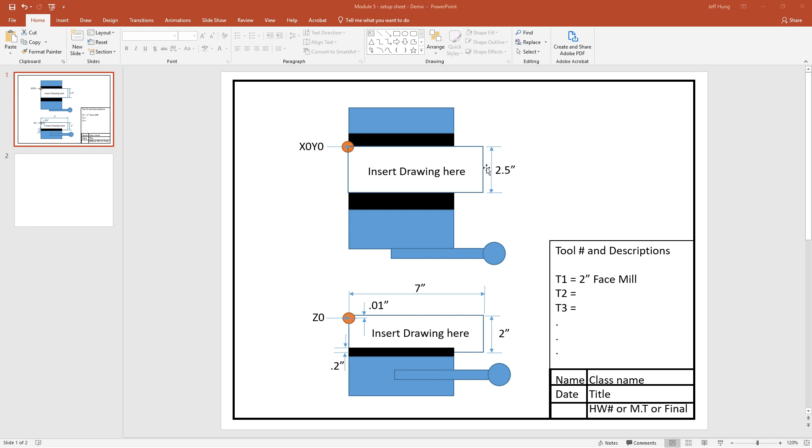Let me start with a new page, and we can start with the frame. Use Insert, Shape, use this rectangle, and just draw a rectangle here. Then use the format and change the fill to no fill. The frame, I want to use black color, and I can actually make it thicker.

I can copy it by holding the Control key, move this over, so there will be two rectangles now. I can make it smaller so I can get the frame like this. Then we can make it bigger a little bit.

Then I'm going to repeat that, and I can repeat this. Just copy one more time. Then you can get a title block like this.

Then all you have to do is repeat this again. Again, hold the Control key. I can make this frame like this, highlight it and move a little lower so I can have everything on this line, just a little lower.

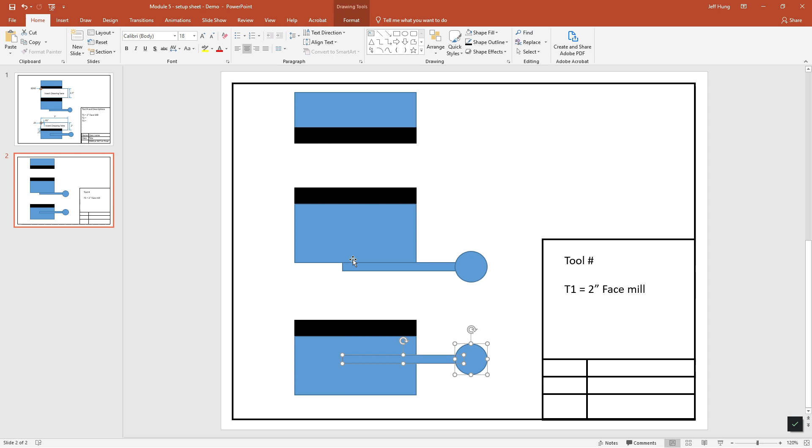Now obviously the scale, you have to change it. If you have a big drawing, make your parts big, make your vise smaller. You can scale everything down a little bit by selecting everything, just scale a little bit like this, but then you just have to move them.

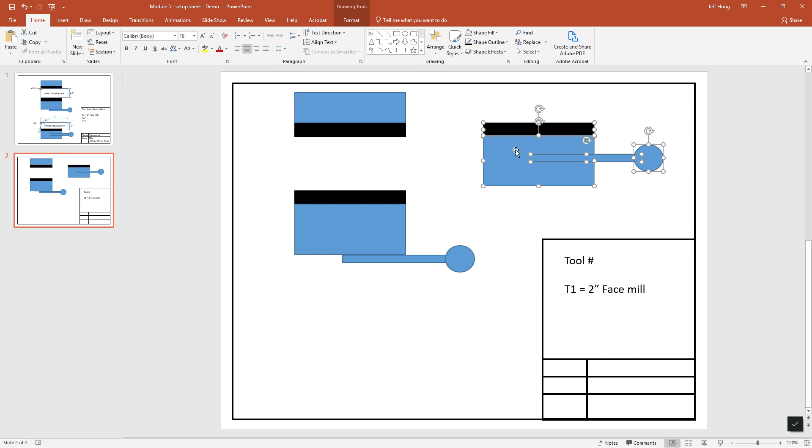Now it is important to have the vise line up following the orthographic projections. So do not place your vise something like this or something like that, because the top view and the front view should not be placed like that. You should follow the orthographic projection that the top view should be above the top of the front view.

If you wanted to have the side view, it will look something different. So if this is a side view, we can do the same thing. Let me move everything over here.

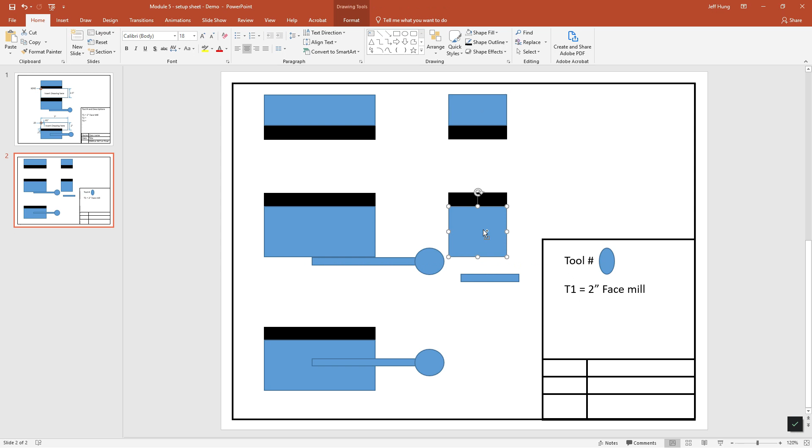If I want to have the side view, I can copy it, but this time I don't need the whole thing. This is the base of the vise, and this is pretty much just the handle. Something like this. Now that's the side view of the vise.

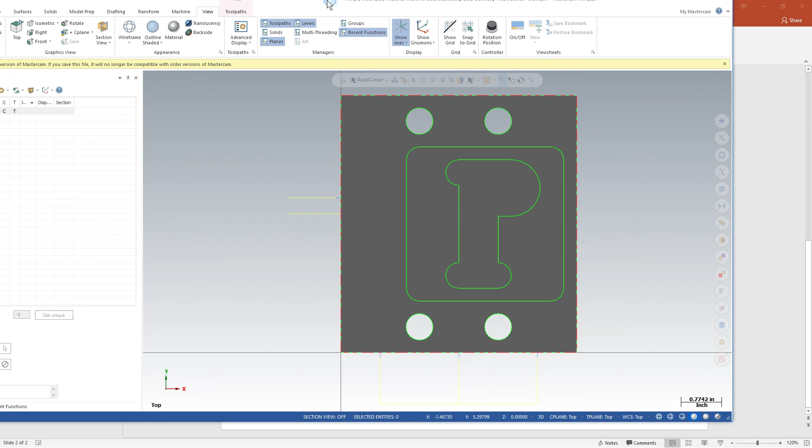So now assuming I have a drawing, I'm going to show you a drawing. Say I have this drawing and I want to put it on the vise. So all you have to do is use either print screen or the snipping tool on your Windows program, the Windows OS snipping tool.

There are other ways to do it. You can use print screen. I'm not sure about the Mac, there is another function also like a print screen, so you can get that screen and then edit it in PowerPoint. Let's say I'm going to purposely make it bigger so it feels like you are using print screen. Print screen actually captures the whole screen, but with the snipping tool you can use just a small portion of the screen.

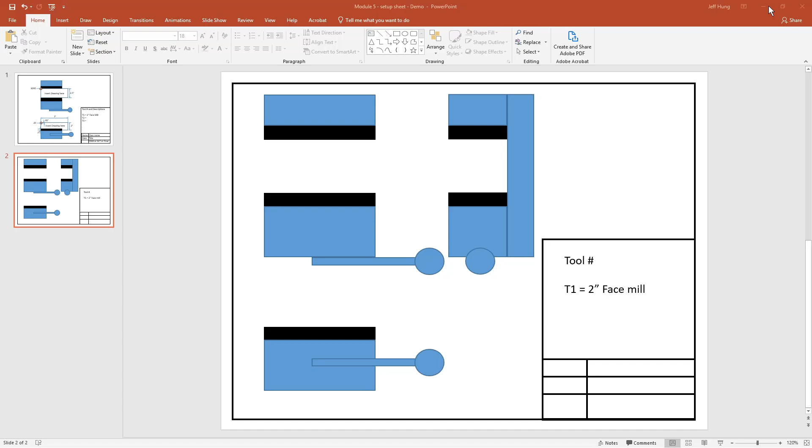So I get that, now I can place it in here, Control V. So this is the drawing. Now because I don't need these parts in here, all I have to do is crop it.

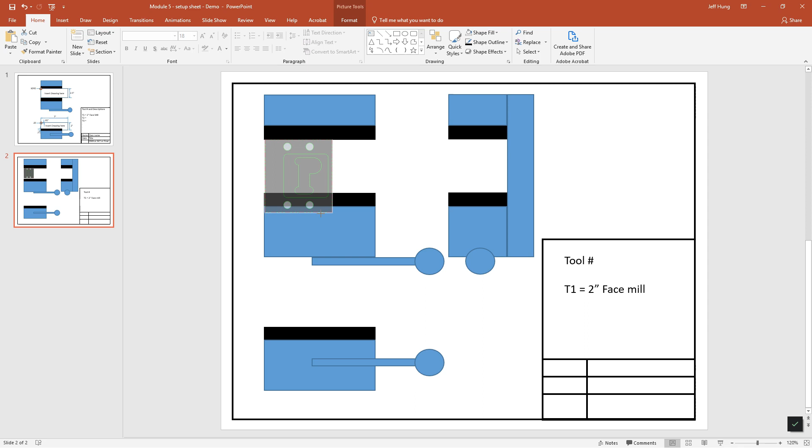Don't worry about the little gray area. So you get this drawing. Now I can scale it down, something like this. Or obviously if you want to make it in scale, if this part is this big, you should make this part that big. And actually you have to move everything accordingly.

Now that will be your top view, side view, actually the side view of the top. So if you're doing it this way, this is your front view and this is your side view. If you do it this way, that's most likely your front view and that's your top view. So it really doesn't matter. All you need is to show people how you hold this part. You can use this part, it doesn't matter.

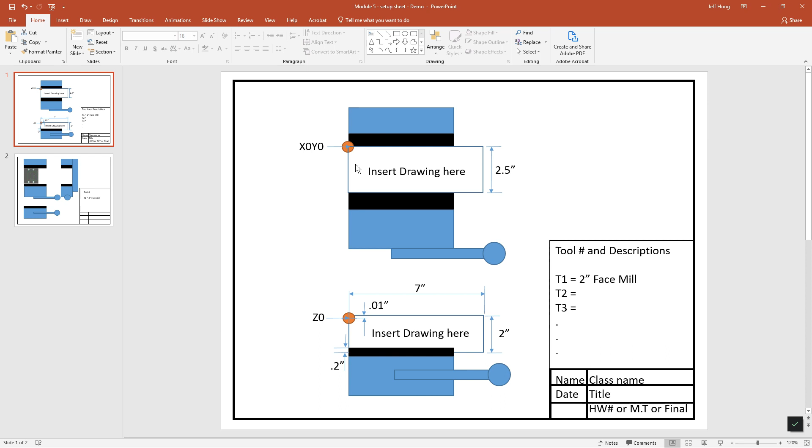But it's important to show this view because you want to see the parts where the X, Y, 0 is. Now to do this part, to indicate the XY0 and also to indicate the size of the block.

So you have to draw lines. You can do the arrows. So that's the size of the arrow. And if you want to use the text box, you can create the size. This is 5 inch.

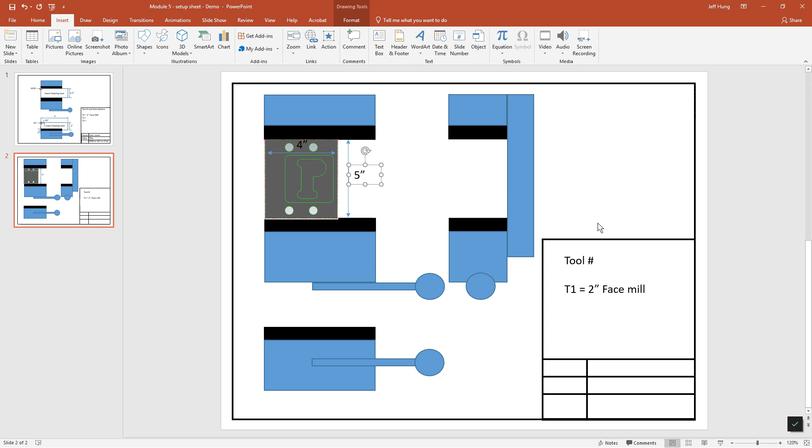Actually, I will do another line in here. That could be 4 inch. And then in the bottom, assuming this is a rectangle, you can do the same thing in here, but instead of copying from the image that you may not have, you can create a rectangle like this.

Now keep in mind this line should be the same width. Don't draw something like this because this is not matching. And I'm going to use clear this time and go something like this.

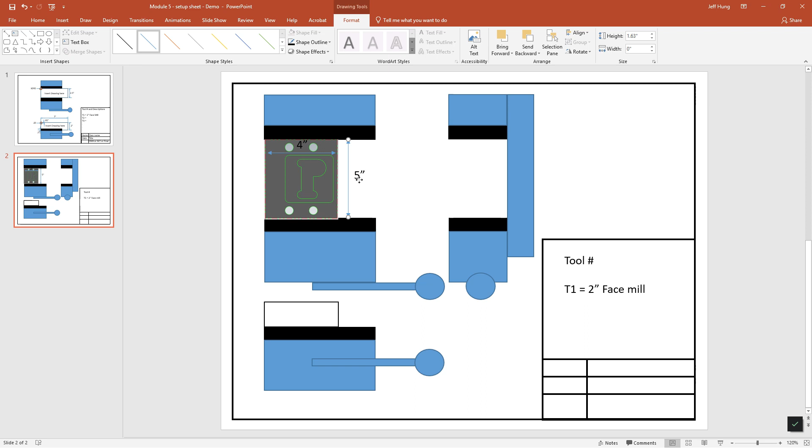Now it is important to show how much this is holding. So if the whole thing is 2 inches or 1 inch, you will need to specify what they are. So you can show it in here by copying this too. I'm going to use these dimensions. So you indicate the block is 1.5 inch, for example. So this block is 1.5 inch.

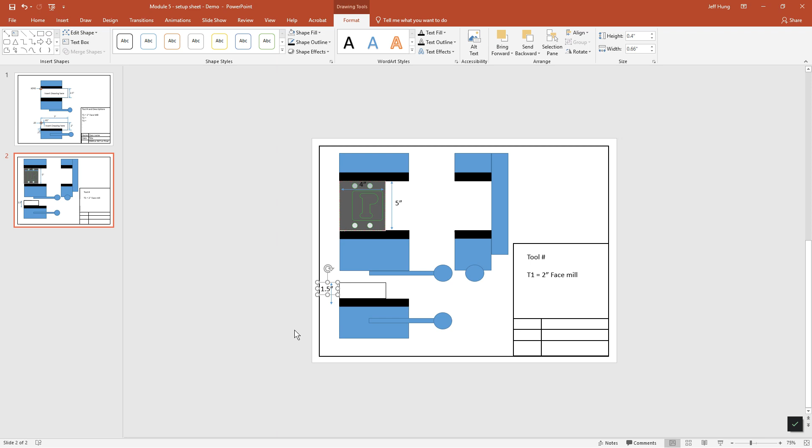Now I don't have enough room. Probably I will have to get rid of this side view because I want to use these two views instead.

So in here I have the whole block is 1.5 inch, but I'm going to hold it for 1/2 inch. So what I have to do is draw a line to indicate where they are.

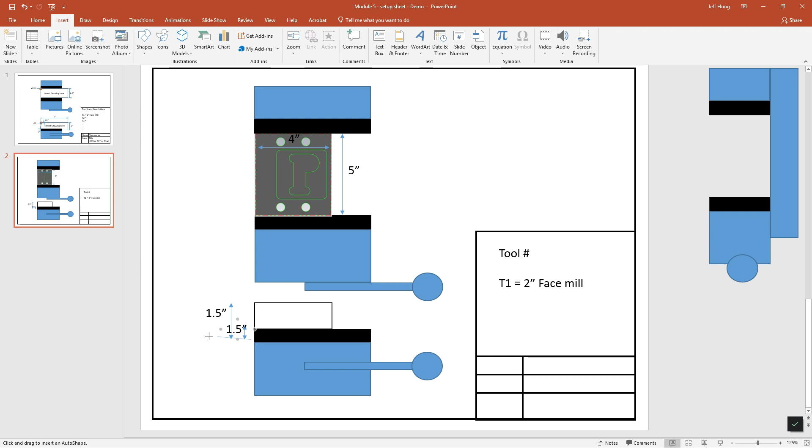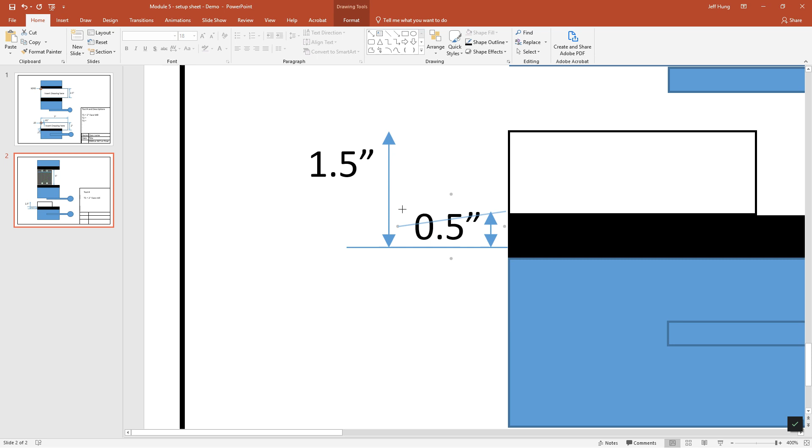So I can go do like this. I can move this over. So I'm going to move 0.5 inch right here. So this way you can tell the machinist you are holding this part. The part is 1.5 inch thick.

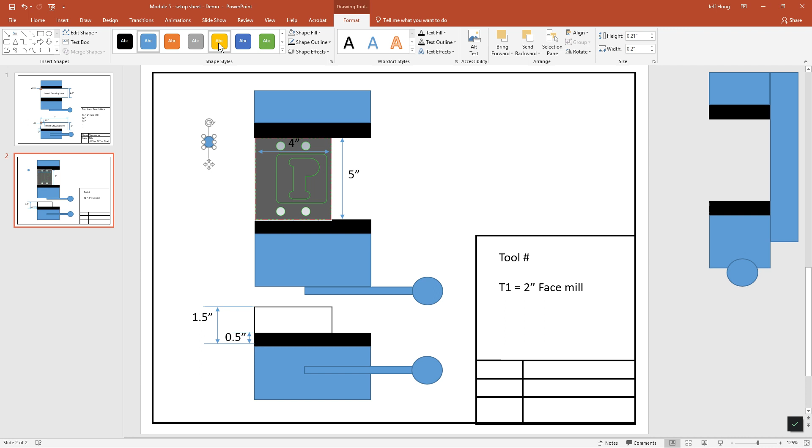You're holding 1/2 inch. Now the other thing is the XY0. I'm going to copy this circle, make it slightly smaller, and give it a color so that you know this is different. Formats, something like this.

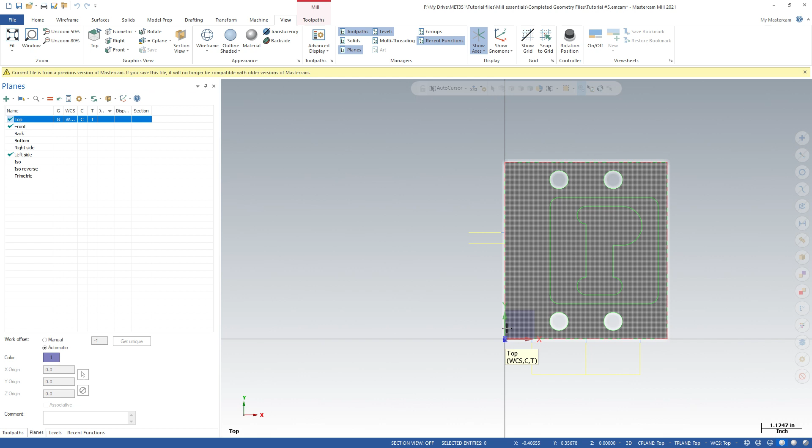I can put this. So depending on the zeros, let's see, go back to the Mastercam drawing. Now let's say right now in here, that's your 0. So this part, this here, that's your machine 0. So your X0, Y0 is going to be right here, this corner. So this means that I will need to create the XY0 right here.

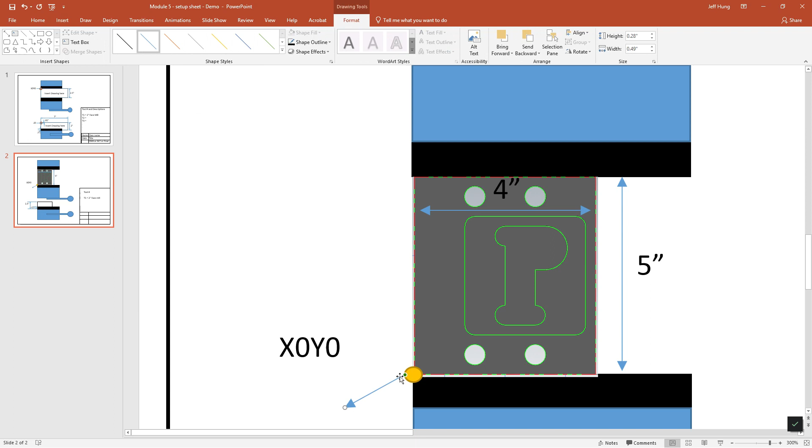So if I have that, now I can indicate the XY0. So I can indicate it in here. X0, Y0. And give an arrow to it. It's the other way around. So that will be my X0, Y0.

And similarly, your Z0, depending on where your Z0 is. If the Z0 is right on the top, you can actually write it right here. That's your Z0. You don't even need this line. So this will be your Z0.

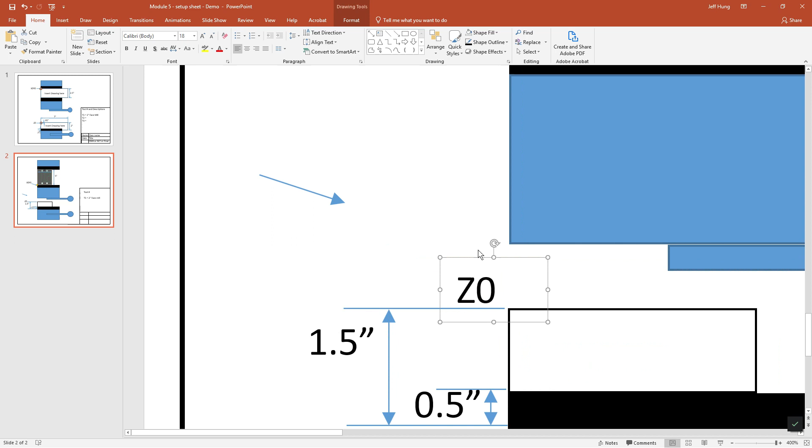You can actually do this, or you can put it as long as you indicate it, you can use the arrow, you can use the circle as well. So that will be your Z0.

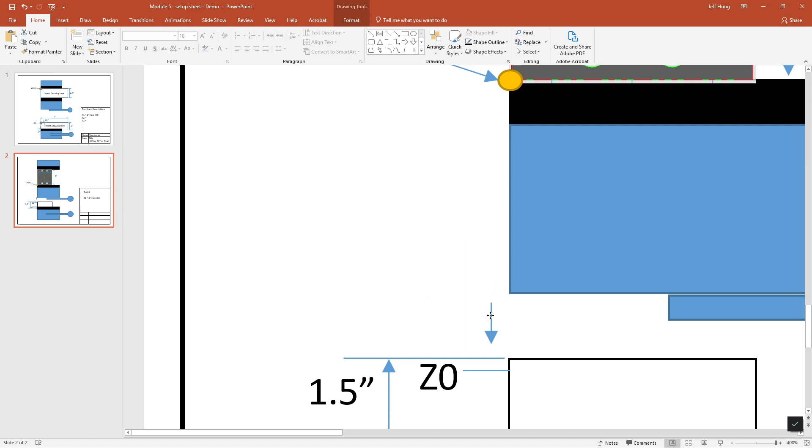Now, sometimes you want to make the Z0 a little bit lower, because you want to face the top surface. If that happens, don't use this circle, don't use the lines. What happens is that you will need to make another line, something like this. That will be your Z0. However, what you have to do instead is give the dimensions.

So you have Z0, and then you can say this is 30 thousandths or 20 thousandths below the top surface. And if that happens, you might want to indicate to the machinist that the part's got to be a certain height from the 0, not necessarily from the top of the part.

So this means this 1.5 might not be valid for that case, because sometimes this block might come in at 1.49, might come in at 1.485, but you can still use it.

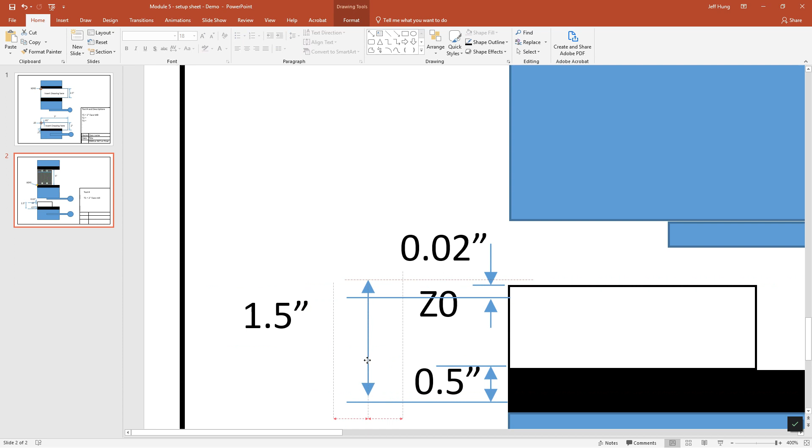So for that reason, you can actually make this line up to the 0. So for this part right now, let's say 1.47. So from the bottom to this is 1.47, and we will tell the machinist that this is the bare minimum for their part. Everything else that you're going to machine could be 30 thousandths, could be 40 thousandths, but I just need this here, at least 1.47.

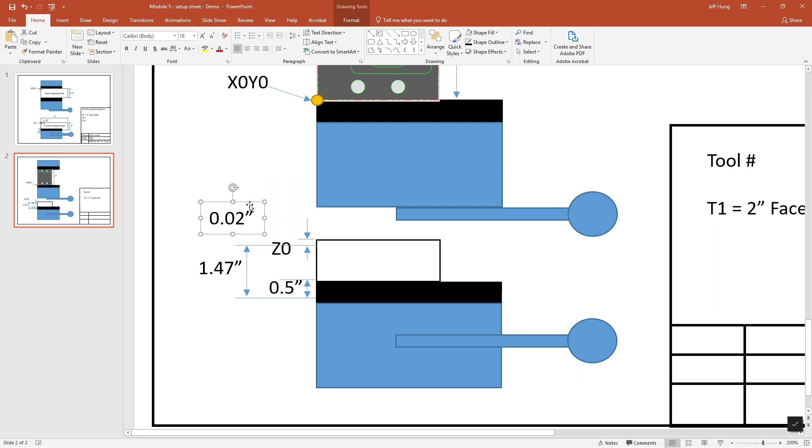If you set it up right, even 10 thousandths in here or 5 thousandths in here could be enough to clean the surface. So if you use this side, you can do that too. Obviously you don't have enough room, so I'm going to make this lower. If I have this, I will have to change this.

Now this is a lot easier to see on the side view because you know where this 0.5 is. If you look at the side view, it looks something like this. And then you can indicate these numbers. Now you can say, I can copy this. This is 1.5 before, right? I can do that.

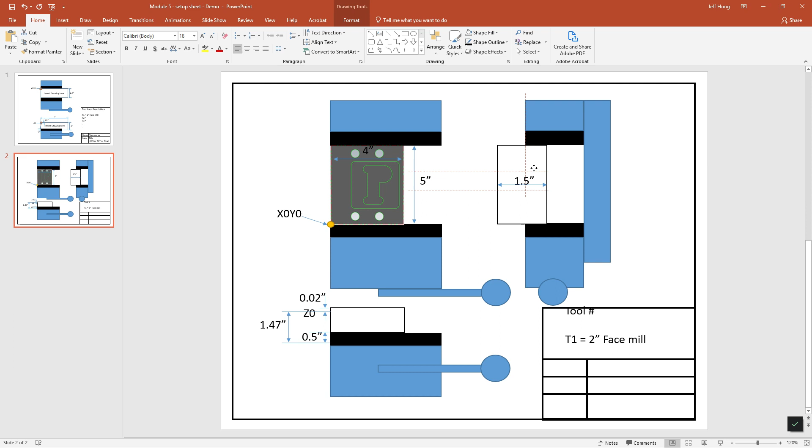And actually I want to copy this. So if I want to copy this, let's just start with this line. And similarly for the Z0, so that will be my Z0. I will go from here, and then that will be my Z0. And then you can indicate how much the Z0 is from the top surface.

So you can say this is 20 thousandths from the top surface, this will be 1.47, and then you can also indicate how much it's holding. So you can draw another line, so this is 1/2 inch from here to that.

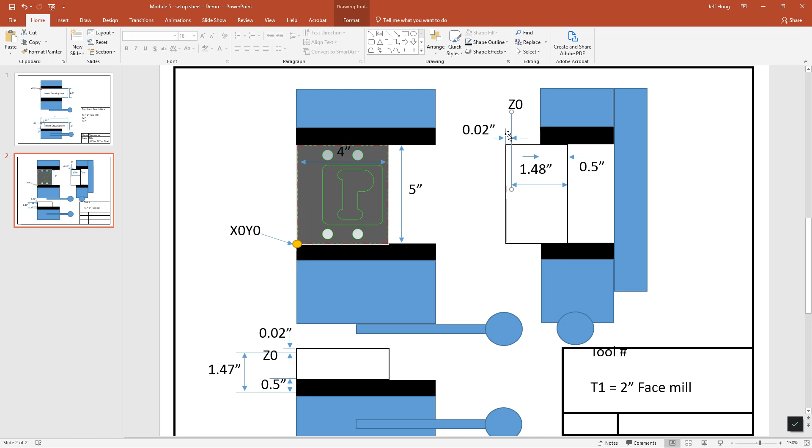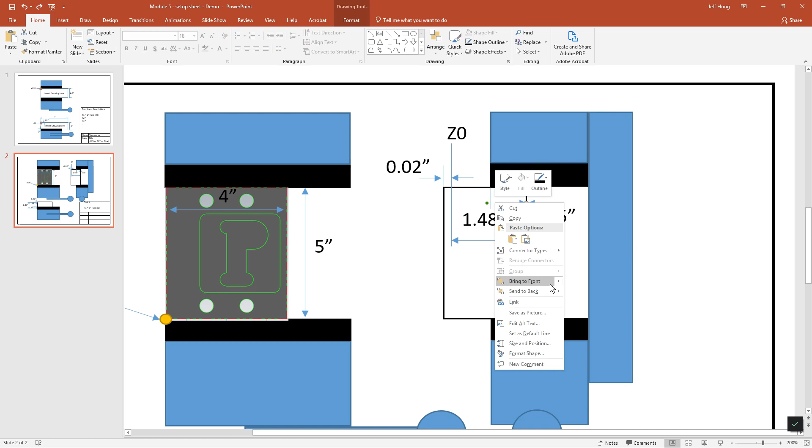So I can copy another line in here. So what I can do is make an arrow like this, and format, change the arrows.

So I can actually have two different views for that, even the side view or the bottom view. Either way is fine. You just need two views, either these two or these two, to show how you mount it, how this part sits where the X0, Y0, Z0, and obviously you want to put some parallel underneath here if this is the side view.

Now, again, all this is very important, is in scale. It is not a requirement that it is perfect scale. You just have to have at least some common sense that if 4 inch should be shorter than 5 inch, 1.4 inch should be shorter than these two.

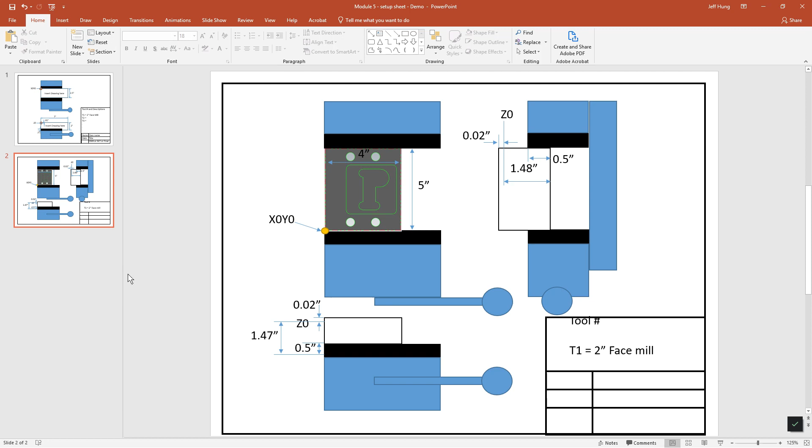So when you create this in PowerPoint, all you have to do is save it, and then when you are taking your exam for the midterm or final exams, all you have to do is bring this and remove this to drawing, insert the new drawing in, and adjust these variables, adjust these dimensions where the 0 is.

Sometimes depending on the part, the 0 could be right in the middle of that drawing, or the 0 could be right here in this corner. So all you have to do is move these zeros and change these parameters, and also modify the size of this block and change these dimensions, and that's it. Then also edit the tool descriptions, and your part numbers and all that.

So once you have this saved, you can use it over and over, and it's very simple to copy the image from Mastercam or any CAD files using the print screen function.

Or you can even draw it in here if this is the initial part. If this is the beginning, let's say for an initial stock, it looks something like this when there's no parts in there. Now when this drawing right now is hiding, what you have to do is right click, send this drawing to back so you can see these parts.